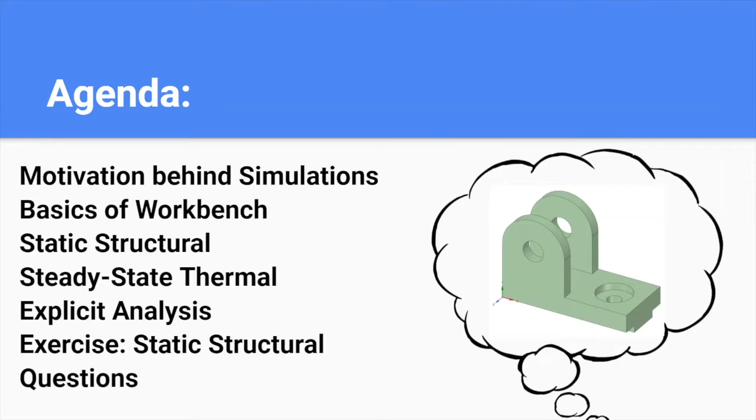If Kyle hasn't already mentioned this, this workshop is going to take about an hour and 15 to an hour and 30 minutes, maybe even less than that, but we'll see.

This process can be sped up by incorporating CAD design into your projects. With CAD design, you can reiterate over a program and overall get a better design and a better first prototype. Last time I went over how you can use ANSYS or just simulations in general to perform heat transfer analysis, impact analysis, fluid dynamics, static structural dynamics, harmonics, and even more to provide a complete picture of your product. In general, CAD can offer increased productivity, improve designs, save time, save money, and simplify sharing with people around the world.

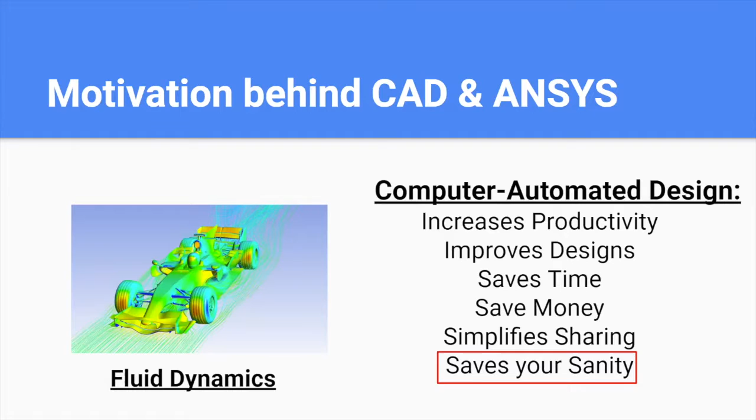If you are on ECF computers right now, you can go ahead and type in Workbench and load up ANSYS right there. I recommend you all open up your ECF computers right now and have Workbench open, because we will be performing the exercise later in the workshop.

All right, so let's go into the basics of ANSYS and showcase some simulations that we can do.

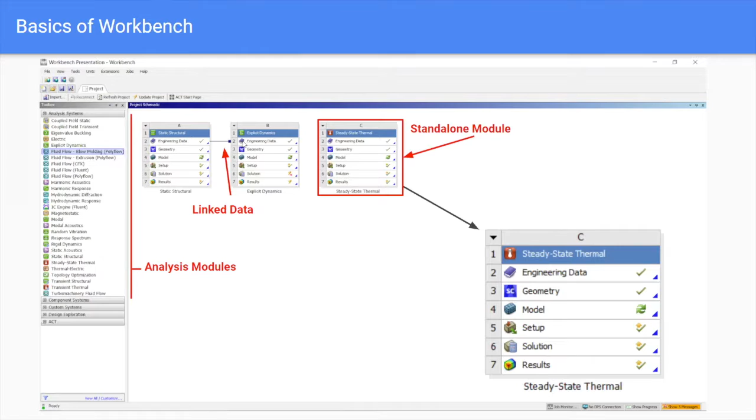So just jumping into the program right here, let me see if I can start a new share. Okay. Hopefully you guys can see that right now. This is my Workbench page.

And you can see I've already preset some modules already. These are the three modules that we'll be going over: static structural, explicit dynamics, and steady state thermal. To showcase how you enter a module, I'm going to go ahead and just delete this quickly.

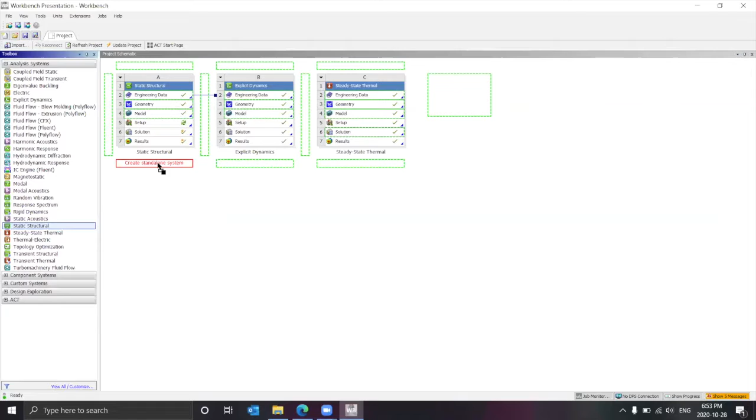All right, it's gone. Say if I wanted to perform a static structural simulation, I would go down to my analysis systems and look for the static structural module, click and drag it into any of these slots where it says I can create a standalone system. I'm just going to click it and drop it right below here, and there it is.

Now, to perform a simulation or any type of analysis on ANSYS, you have to follow a set of general steps. These steps are provided in your aid sheet, which I will provide right now.

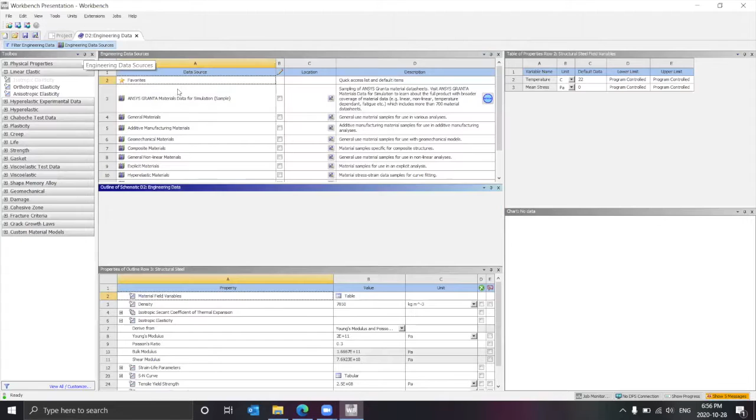Click it once, and you'll be sent to a different page, where this top box is replaced by various libraries you can choose. When you go into a library, if I click it once or double click it, the materials found inside can be found right here.

You can scroll through and see all these different types of materials, ranging from wood to plastics, carbon steel, bronze. These are very general materials in this library. You can find different materials in different libraries.

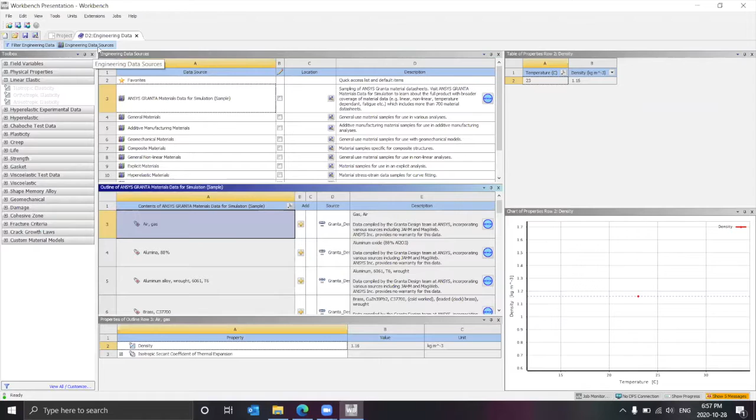For this presentation, I'm going to choose oak wood, because why not. I'm just going to click on that plus button to add it. After the whole box refreshes, I just click off of Engineering Data Sources, and my oak wood ends up in my arsenal.

If I click on it once, you can see that the material properties of oak wood are listed down here, where some give a constant value, while some give a tabulated value.

If I were to click on table, for the tensile yield strength, the table comes up in this top right corner. This is where you'll see all your tabulated data, and the bottom right corner is where you'll see the data on the table but graphed. Because there's only one table point, you're only going to see one graph point.

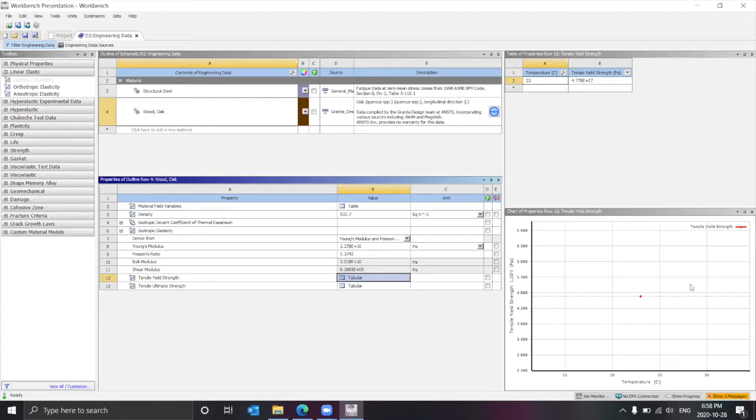Now, say you don't want to use the ANSYS library to find your material, say you want to make your own material. I want to make my own material and call it, I don't know, blue. Okay, well blue's been made, but there are no material properties attached to it.

If I want to attach a material property to it, let's say Poisson's ratio or just some isotropic elasticity, I can go to the left toolbox. This whole left-hand side has a variety of material properties that I can drag and drop from and apply to my model.

So I have blue selected, and isotropic elastic selected, and I think if I double click, it will be applied to my material. Now you can see there are some highlighted bits I have to click on—ANSYS froze over a bit, but I just have to click on and type in whatever I want. Set this to megapascals. That is very small.

Whatever, that is very big. Hold on, there, okay. And Poisson's ratio, you can just set it to something like 0.2 or something, and then you can add more material properties as you see fit. That's about it for engineering data.

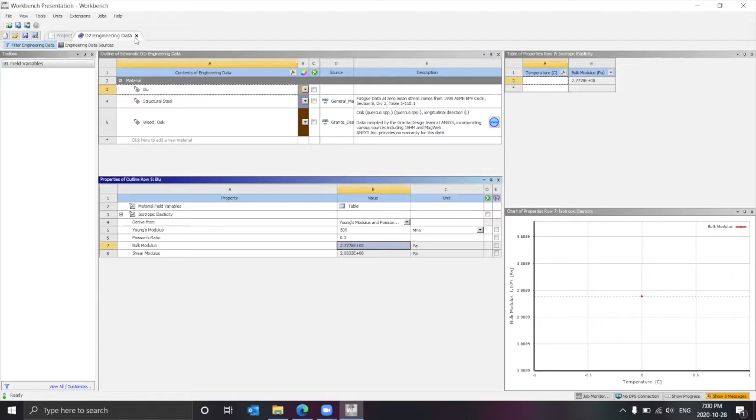Once again, you just start off with your basic arsenal here. If you want to add more materials, you go into engineering data sources, pick out your material, and you can review the properties here, tabulated data here, and graphed data here. Once you are done with engineering data or picking out your material properties, you just gotta click the X button right here, and you'll be brought back to the project page.

Once you're done with a certain section of your module, you'll see a check mark appear on the right side. That means that you've performed everything you need to do properly, and you're ready to move on to the next step.

The next step is, like it says in the sheet, to create your model. And to do that, if you double click the geometry tab, you will actually open up SpaceClaim, where you can go ahead and model whatever you want, and it will be saved into that module.

However, I have a model that I want to showcase to you guys. And to do that, I'm just going to import by right-clicking and clicking on import. It's already here, but you can go ahead and click browse and just search up the SpaceClaim file for yourself. But I have the model right here.

I'm just going to click on static model. And look, as you can see, check mark appear. I'm just going to go into SpaceClaim and just showcase what the model is. And from there, we'll move forward. Let's let SpaceClaim open up for a second.

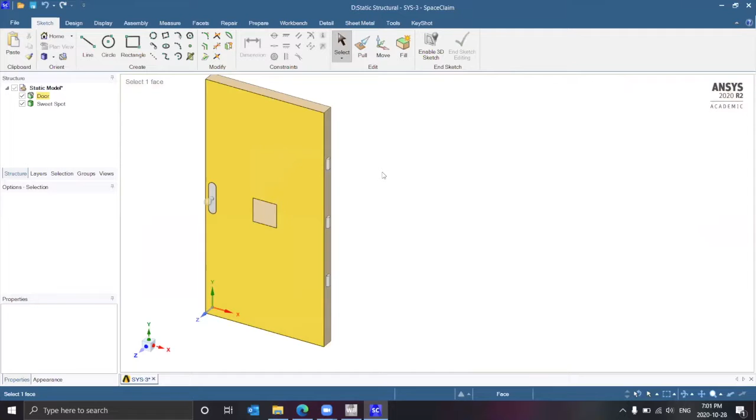Okay, but this is just a rectangular prism. No, it's not. It is actually a door. Why did I model a door? Because I wanted to showcase a sort of generic situation that you may apply static simulations to, and might be useful for your everyday life.

So imagine this door is in your way and it's locked, and you can't go around it, and you have to go through it because there is something that you want on the other side. Let's say, I don't know, your phone, your treasure, or whatever. Okay, and you don't have the key. As you can see here, I specifically did not model a keyhole, so you can't use a key to get in. And this is an assembly, so that doorknob doesn't move as well. So this door is basically non-functional. It's kind of just stuck in the wall. How would you get through?

My first idea was to just press against it, press very hard against it until it breaks. And when it breaks, I'll be able to go through. So I want to use ANSYS simulations to figure out how much force I would need for this door to break. And that is definitely possible.

The first step, though, is of course creating the model. But an important part in creating the model is that you want to simplify the model so that it only fits the context of your situation. Because the bigger model you have, the more complex model you have, the longer it will take ANSYS to calculate the result for it. So if you want to save your time, you would want to have a much simpler model.

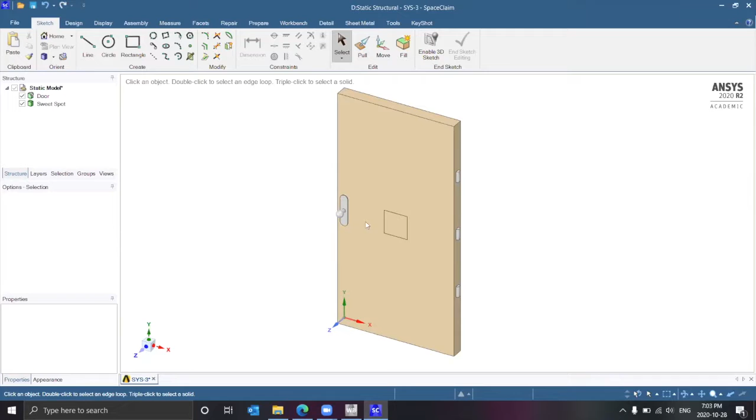In my case, I'm not going to be pressing against the entire door. Rather, I'm going to be pressing against this single section of the door, and I'm going to be trying to break this part. In my mind, once I break this part, I've basically broken through the entire door. I know that if I press my hand against this part of the door, or the hinges, or whatever, it probably isn't going to feel much stress. I'm only trying to break here.

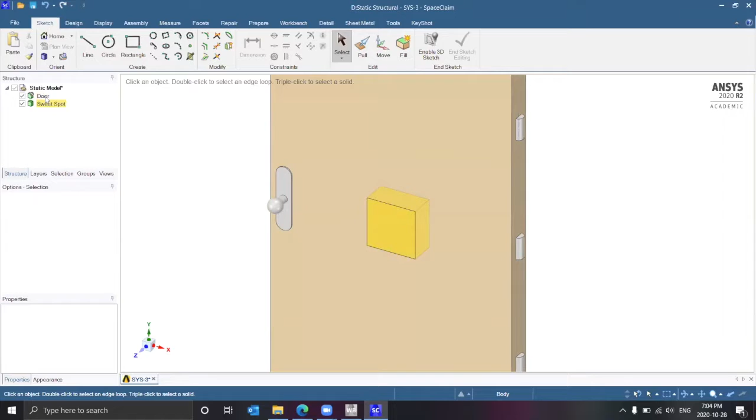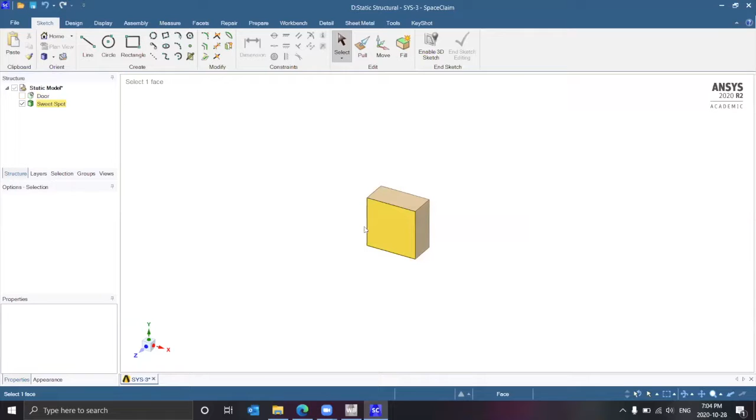So what I've done is that I've separated the door and what I call the sweet spot into two different solid objects. And when I go and right click the door, I have it suppressed for physics. What this does is that it ensures that the remaining part of the door does not show up in my simulations once I get to that step. And as an extra step, I can choose to just hide it altogether. So now I just have the sweet spot.

Before heading off into the simulations portion, one important part to check on SpaceClaim is your topology, or in other words, the surfaces that are in contact with each other. You can check that by clicking on the overall structure tree and going down to properties to look at shared topology. Here, I want my shared topology to be none, because in this case the door doesn't really exist. But if you have models with connecting or touching parts, you'd want to change the topology depending on whether you want to merge or share.

The difference between having none versus merge or share is that if merge or share is enabled, the two bodies will somewhat merge, and later when you create a mesh, the mesh will be combined between the two objects rather than staying separate. So depending on your project and application, this might be important for you.

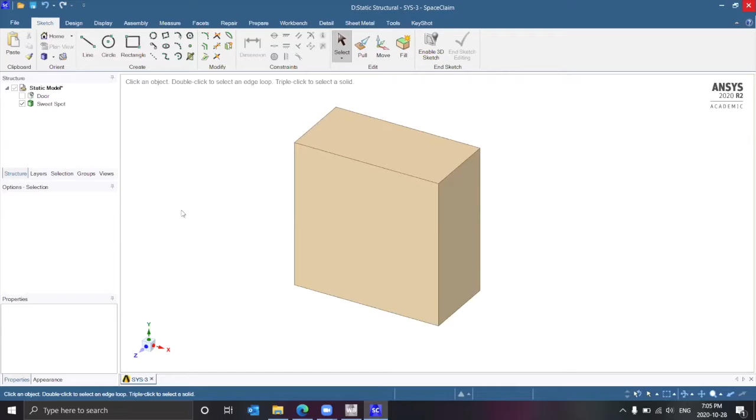Once you're done with your model, you can just click X. SpaceClaim already saves the model into the module. You can go ahead and go into the model section. This takes even longer to load, so just sit back for a bit.

Yeah, it's taking a while. If you don't want to just keep staring at this, you can check the bottom left where it says starting mechanical, just so you know that Workbench is working on opening the program.

Okay, now it's loaded up. Just like how in a Workbench module we were going down the list—engineering data, geometry, and model—we're also going to be going down the list over here, specifically this part, to complete our simulation. This is common across any sort of simulation that you do.

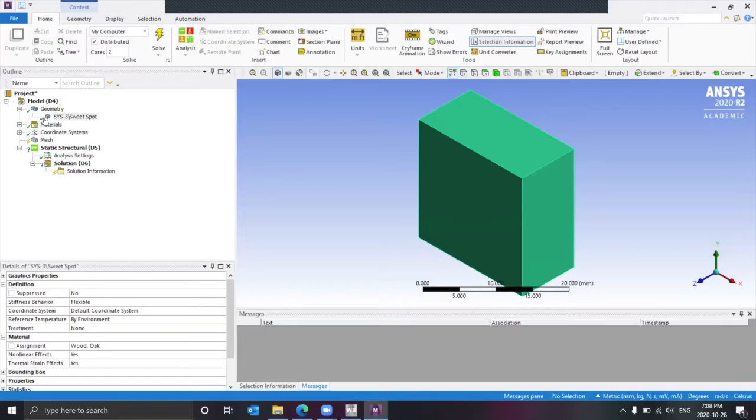Here you can see that the default assignment is structural steel, but I want my door to be made out of oak wood because I actually want to break it down. Now that that's been done, you can see the little check mark appear, and that's all good. Materials isn't really important—it just lists all the materials you have in your engineering data. You don't really need to look at that.

And you don't really need to look at coordinate systems either. This just shows the global coordinate system or whatever extra coordinate systems you may have inserted in your SpaceClaim model.

The next important part, which is also in your sheet, is the mesh step. To perform a mesh, what you have to do is click on mesh once, right click, press insert, and you first want to insert a sizing of your mesh. I'll explain a bit more what a mesh is once we actually create it, since it's easier to explain visually. So the first thing you always want to do is insert your sizing.

You can see there are two highlights I have to fill out, the first being geometry. So I have to go to my selection tools, select my body using the body select tool, and then apply it. Now the mesh is applied to that.

ANSYS sets a default mesh size depending on the size of your model. You can change it to whatever you want—I'm just going to set it as 2 millimeters, though it doesn't really matter for me. In general, if you want a more accurate result, you'd want a smaller, finer mesh. If you don't care about the result for a specific component or part, you can go for a larger mesh.

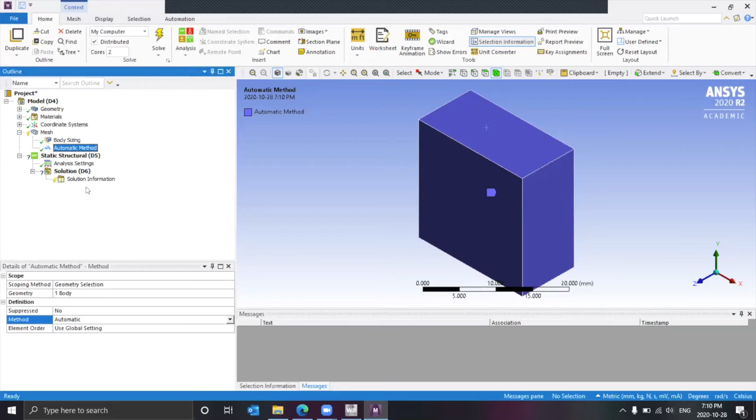So to actually generate your mesh, all you have to do is right-click your mesh once again, and instead of going to Insert, you go down to Generate Mesh. You can see that ANSYS is working on it pretty quickly because it's a small object, and the mesh has been made.

So what is a mesh? Basically, a mesh is made up of nodes and elements. Nodes being these edge points right here, and elements being the lines in between them, with an element being the square shape. To oversimplify what goes on, a calculation happens on each node, and the result is put into a matrix. Each element has its own elemental matrix.

In this case, it might be a 4x4 matrix of stress or strain results acting between each of the nodes. Then you expand that, and every element has its own matrix, and there's a huge global matrix which is solved and gives an overall result of which parts of the model, which elements, are receiving the most stress, and which aren't receiving that much stress or strain.

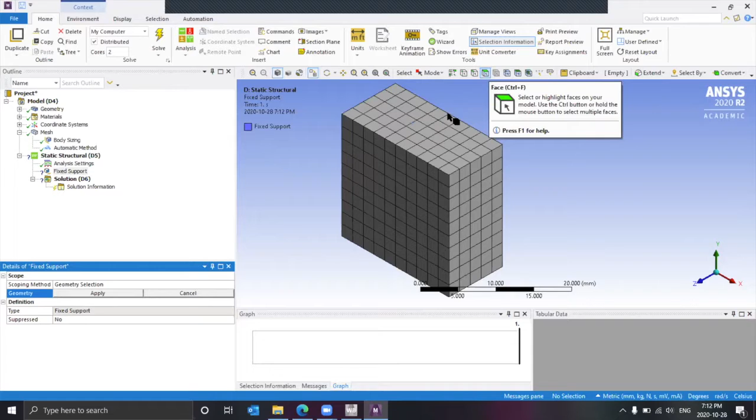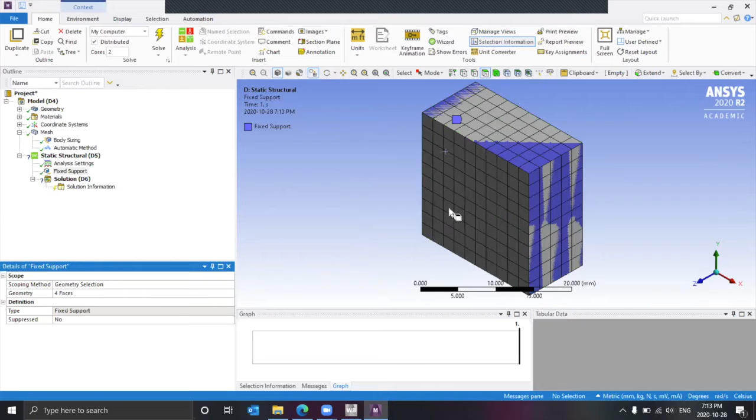Using the face selection tool, onto the faces while pressing and holding control, I select my door piece, because in reality this door piece is attached to the door, and it isn't supposed to be moving anywhere. So once that's done, just apply that. You can see that the fixed support has been applied on all 4 faces with the coloring.

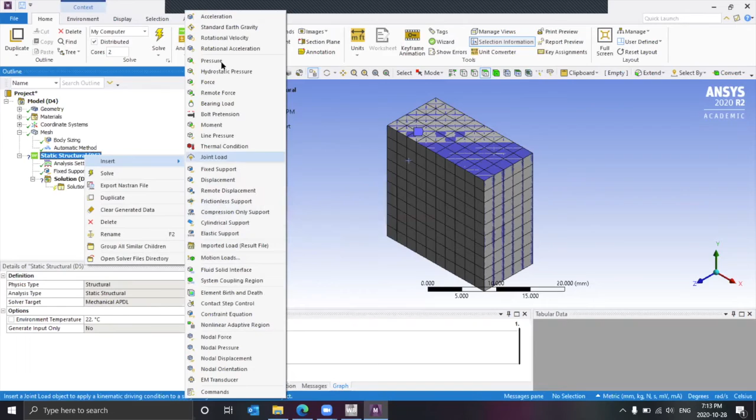Next, I'm going to go ahead and apply a pressure on this face right here. I'll do that by pressing insert, and instead of a fixed support, I could have also done displacement or a frictionless support. But I'm going to apply a pressure right here. It wants me to select my geometry again, so I'll use face selection, use this face, apply, and apply a pressure of let's go with 100 megapascals. I don't know if that's exactly right, but for the sake of simulation, we'll just use that.

All right, the arrow's going in the right way. We are pretty much set, as you can see with the array of check marks. The last step is to call upon your solution, to tell ANSYS what you want to see. To do that, you right-click solution, press insert, and I want to see my total deformation. I also want to see the max equivalent stress, and the equivalent strain.

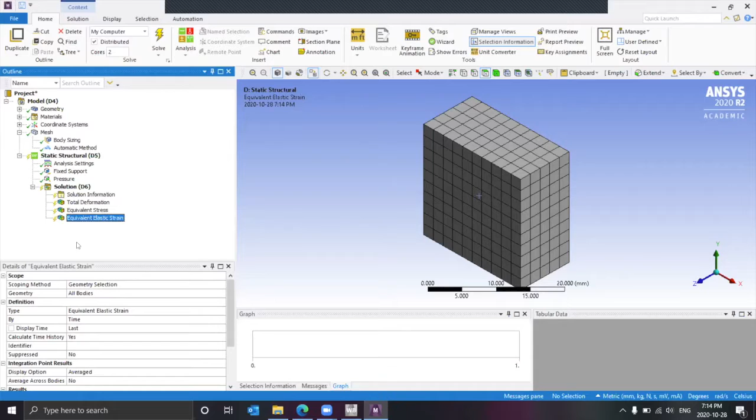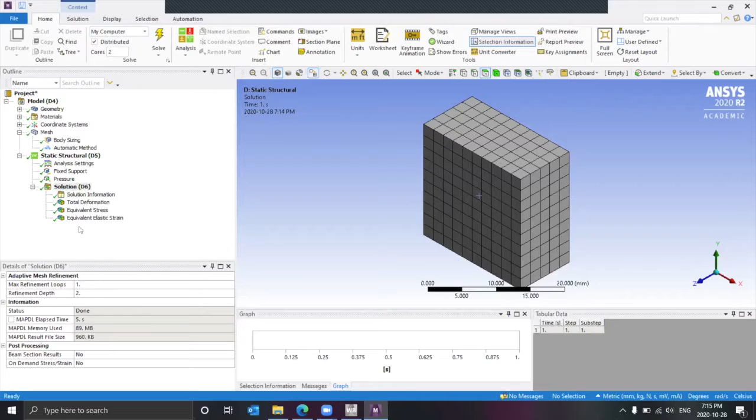All right, once I have all those set, I'll right-click solution once again and press solve. ANSYS will take a couple seconds to solve the model. You can see that they all have check marks beside them, and that means the simulation has been a success.

To see your result, you just click on each one, and you can see the deformation that occurred when I pressed against the door with 100 megapascals. You can see the stress, and that it's especially accumulating on the edges where the door is fixed to the remaining part of the door. You can also see that there is an equivalent amount of strain happening over there.

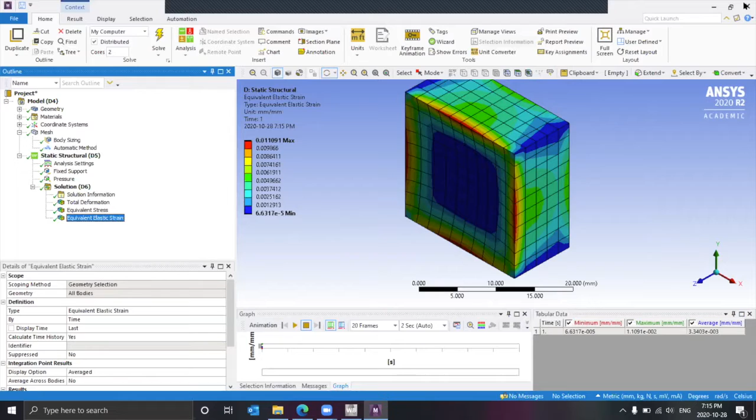So this is just one example of how you can perform a simulation on ANSYS. The general steps are more or less the same on any module you decide to choose. I'm going to be moving on to explicit dynamics to showcase how you can perform an explicit dynamic simulation.

I'm not going to make a new module because, as you saw before, solving could take a while depending on the simulation, and explicit dynamics especially takes a very long time to solve. So I have it already solved, and I'm just going to go over my steps.

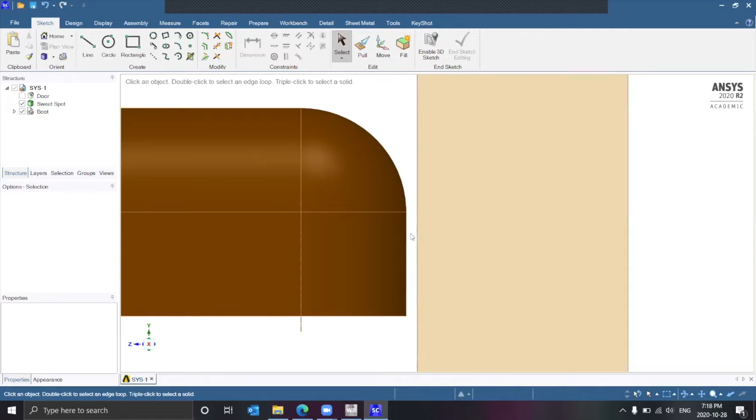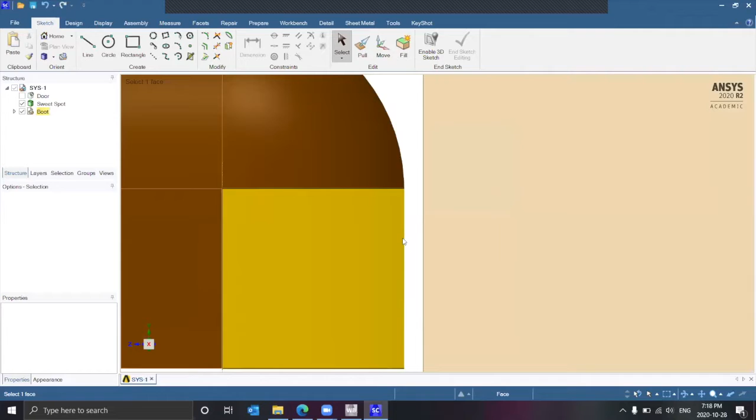The reason you want to do that is because the further apart the objects are from each other, and the more you tell ANSYS to make them move — if I had to make the shoe move from like a meter away, or even a centimeter away — the computation time ANSYS will take to complete the simulation is going to increase exponentially, and you don't want that. You want a very quick computational time. Even here, with like a 0.1 millimeter gap, this takes at least a minute or 2 minutes to do, which is why you really want to keep it as close as possible.

Yeah, that's basically it. I just wanted to showcase what I modeled right here. Because the two objects aren't touching, there is not going to be any shared topology or anything, so we don't need to worry about that, and we can just go ahead and click off.

All right, going to our model. I'll let this load. Once I have this loaded up, I'm gonna load the remaining two modules just so it's quicker. Okay, that is loading up. See if that works. Okay, so this is all loaded up.

It's the same general steps to perform the simulation here, with a couple variations for explicit analysis specifically. Once again, we go to our geometry and click on both to make sure they've been transferred in properly, and we assign our material down here — in this case, the oak wood door and the structural steel boot.

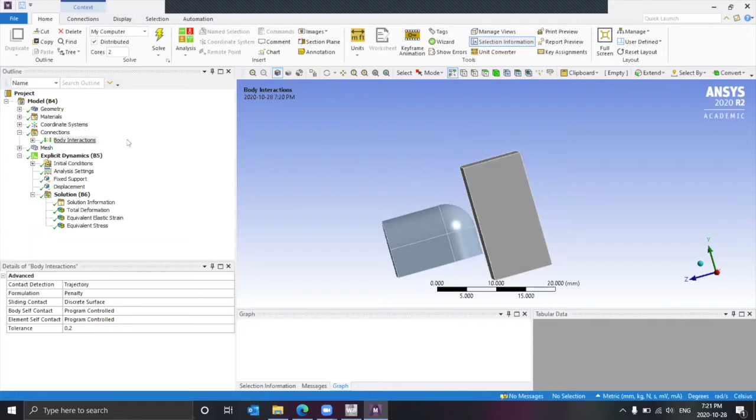We can skip materials, skip coordinate systems. You can see a connections portion right here, which is showing 0 body interactions. This connections tab basically showcases any sort of contacts happening between two or more objects. Because there's no actual contact going on between the two, we have no body interactions, but you will see one in a bit.

The mesh has already been completed. I inserted a body sizing for each object, and I made it automatic method for both — I let ANSYS choose the best method to make the mesh.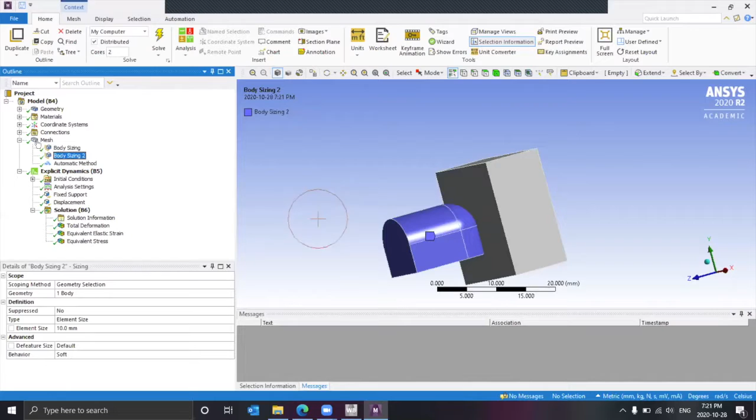The reason I chose a different body sizing for the two materials is because I really only care about the door. I don't care about my toes, my shoe, or what stress accumulates on my boot. If my foot breaks, so be it—I'm just trying to break this door down. So I'm going to have a finer mesh on my door so I can more accurately see when my door fails, and less accurately see if my foot fails.

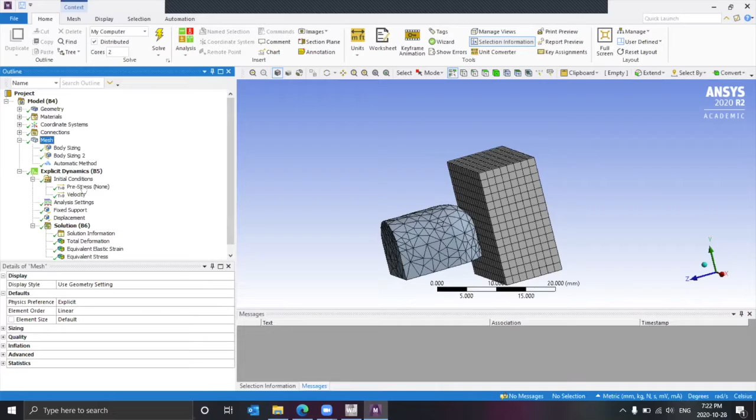Once that's done, in your explicit dynamics tab you first set your initial conditions, which can either be a pre-stress, which I listed at 0, or a velocity, which we have to list because the shoe is hitting the door with some velocity.

Here I went a bit crazy—I selected the body first of all, that's why it only has the one body selected. And I put in a velocity of negative 50,000 millimeters per second, which, if we change the units in the bottom right here, is 50 meters per second. So yeah, a bit fast.

Once you have those two done, you'll see a check mark, and you can go ahead and fix your analysis settings. You may have seen analysis settings in your static model, but I never went over it because it didn't really matter. It matters here now because how you configure your analysis settings determines how long ANSYS will take in solving the model.

If I click on analysis settings and go down, you'll see a lot of different things, but there are only two things you need to know. Those are your end time, meaning how long you plan to perform the simulation for. Here you can see I made it in the range of microseconds—this is happening extremely quickly, and I only need to see the stress in that small window of time.

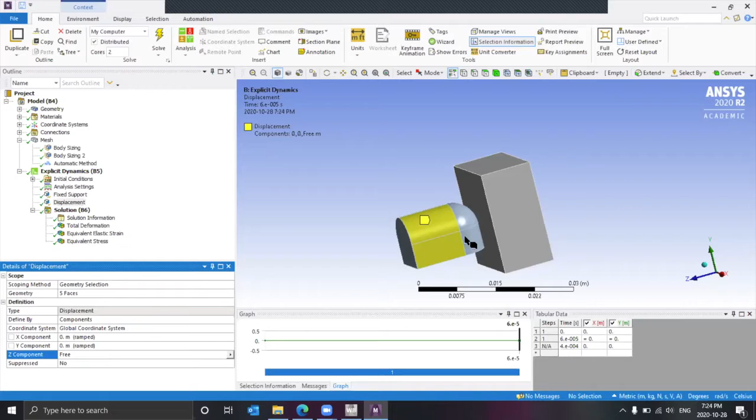What you would do is first select either the body or all the faces, and then select which of the three axes you want the object to move freely at. In this case, I selected that the Z component is to be free because the shoe will be going in the Z direction, and I fixed it so it can't go in the X or Y, because we simplified it enough to go in the Z.

A note on simplifying your simulations, or adding assumptions, like the one I just did, where I said my shoe isn't going to be going in the X or Y direction at all—only straight in the Z direction. This is an assumption that, if I were in an engineering design project, I would have to list down somewhere that I made this kind of assumption, or else your professor or client might be a bit questioning regarding the results.

You could be a bit more complicated and add your X and Y components, but simulations are able to give sufficient results even if you simplify it a bit.

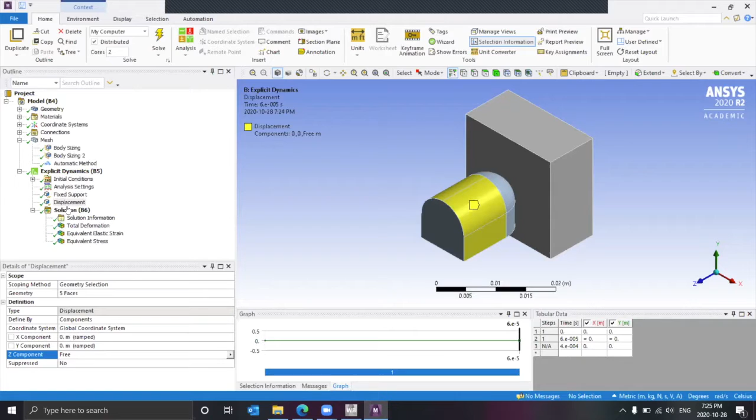All right, once you're done with that, you have everything else set up. You can go ahead and call upon your solutions by right-clicking, insert. I call upon my deformation, my strain, my stress—they're all right here, and you can see the results already preloaded. Once again, to solve, all you have to do is right-click and press solve, or it would be up here as well.

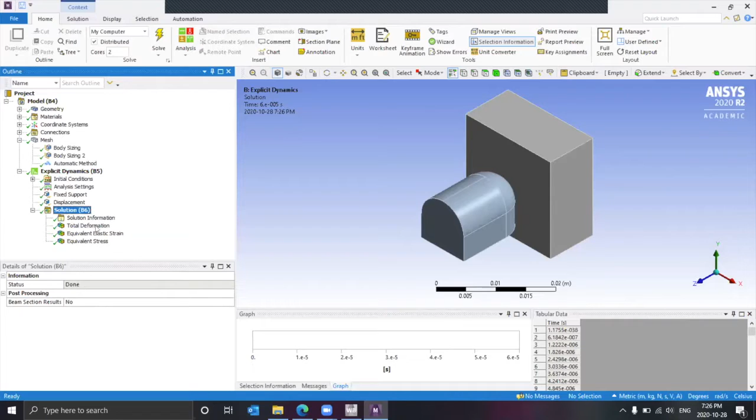To see your explicit analysis in action, all you got to do is press play, and you'll see it happening. You can increase the frames to up to 100, and you'll see it happening a bit more like slow motion. You can see my foot gets a lot of stress or deformation, while the door doesn't really get much.

So a couple questions you might be asking is why isn't this door splitting apart from the back, or exploding? Well, it's because of the material I selected, a general oak wood material with only elastic properties. The material does not have plastic properties or properties in the failing region of the stress strain curve, so ANSYS does not know how or when this material will fail, and so it can only show the elastic portion of the simulation.

If you want to add plasticity or failure conditions to your simulation, you would go into engineering data and manually input that plasticity data as a table. You'd need a variety of points at different strains for different stresses.

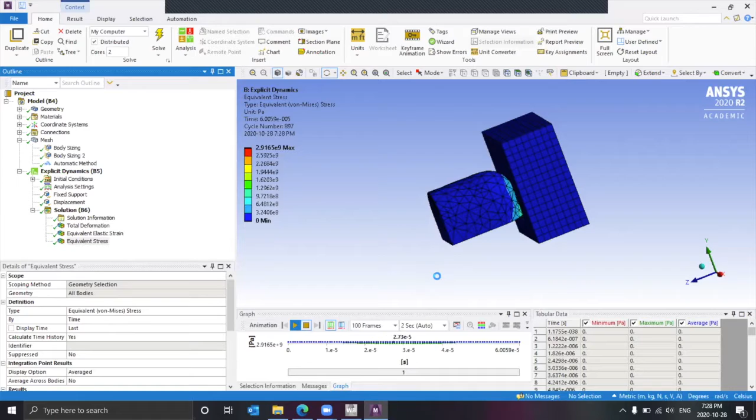Same story with equivalent stress, you can see nothing really is happening. But that is overall how you can perform an explicit analysis simulation.

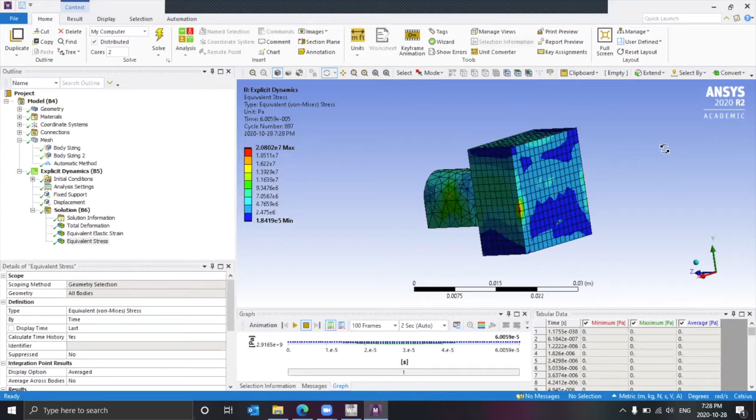Now that that is done, we can move on to the last module we're going to go over before the exercise, steady state thermal. We've already gone over the first two, engineering data and geometry, so I'm going to skip right to the model, which did not load, so we have to wait a bit for it to load again.

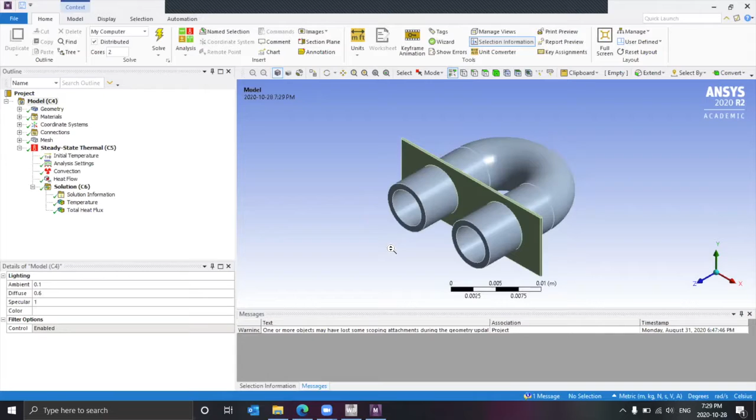This model is separate from the whole door breaking thing from before. This is just a simple model to showcase steady state thermal. It's loading up. This is a simple piping system which will have heat applied on the inner walls, and a fin acting as a piece to transfer heat away from the pipe, sort of like a heat sink.

Once again, checking if my geometry made it through. It has: my piping and my fin. They're two separate objects because I want to set my pipe as copper alloy, which I got from the engineering database, and my fin to be of aluminum alloy.

Once that is done, you can go down, and connections has something interesting. If I go through the menu of connections, you can see ANSYS detects the contact between the piping and the fin, and the areas or faces are highlighted. I can define the type of contact these two are facing by going by type. By default, ANSYS assumes it is bonded, meaning the two objects aren't supposed to move between each other, which is what we're keeping.

But if you wanted the fin to be able to move against the copper alloy with some sort of friction, you can select that here, but you would have to enter a frictional coefficient. I'm just going to stick with bonded.

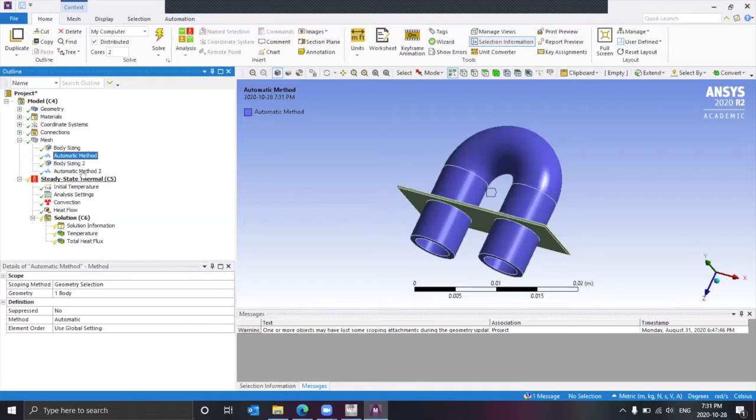Same story with mesh, you apply a body sizing for each thing. I made the body size of each element sort of the same because I want to see the heat flux and temperature for both objects, and I also just applied the automatic method for both of them.

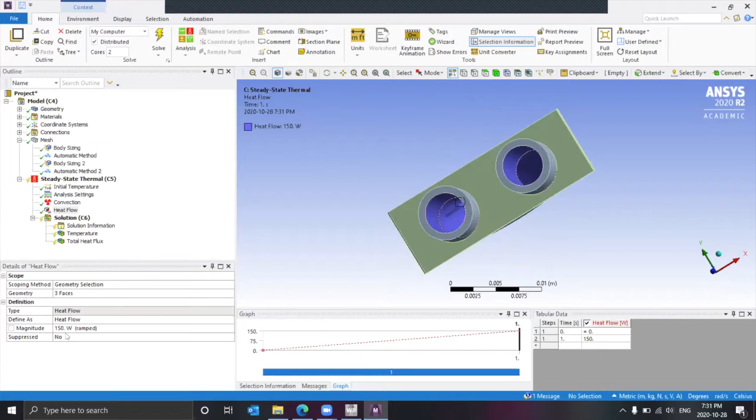For applying my boundary conditions and loads, I once again right-click Steady State Thermal and insert, and I have a library of things to choose from. In this case, I went with convection and heat flow, with heat flow being the inside of this piping at 150 watts, and my convection being on the faces of the fin with the film coefficient at 2.5 watts per meter square degree Celsius.

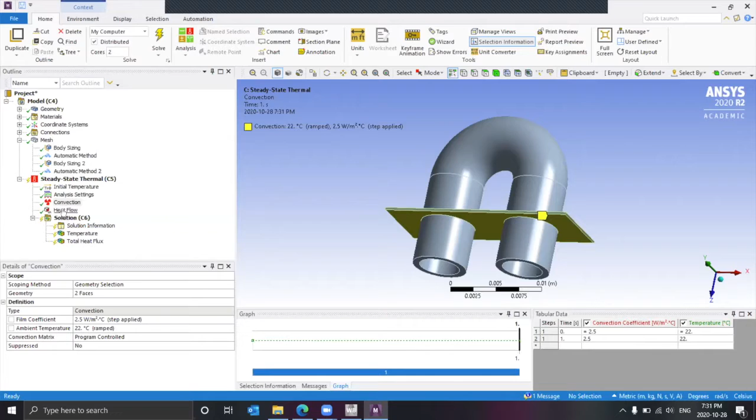These numbers are something that you'll have to put in when applying these sort of boundary conditions. So that's just something to keep in mind.

You're also able to apply an initial temperature. By default, I believe it is about 22 degrees. You can set it to whatever, 24, room temperature, whatnot. And you can also mess around with your analysis settings right here.

Steady state thermal isn't as demanding as explicit analysis, so you don't really need to do much here to save computational time. Because I had made an edit up here on the connections part, ANSYS is requiring me to solve the model again, which is no problem. But you can see here that I called upon insert thermal temperature and insert thermal total heat flux because I want to see those two things. If I just right click and press solve, it should solve in a quick second.

So this error message that I got right here is something to do with the geometry, but because I have my results here pretty successfully, this isn't a very major error. There are some errors that will not allow the simulation to go through, and it will typically tell you what you would have to do by just double clicking and reading the error, and you'll know okay, what went wrong. Was my mesh too fine? Was my temperature too high? Was it too complex for ANSYS to solve? You'll be able to figure out what's the error, and you'll be able to solve it.

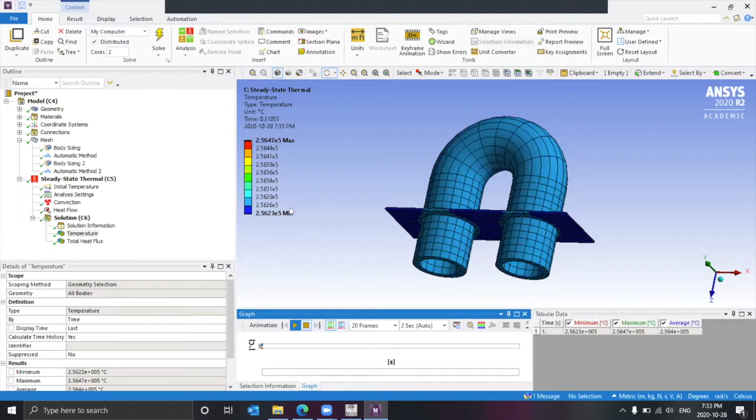So if I go up here and just click on solution and click off the error tab, I can press play, and you can see how the temperature changes over time. And I can also see how the heat flux changes over time. You can see that there is a good amount of heat flux that goes into the fin, but possibly not enough. Maybe another fin right here might be good for additional cooling of the pipe.

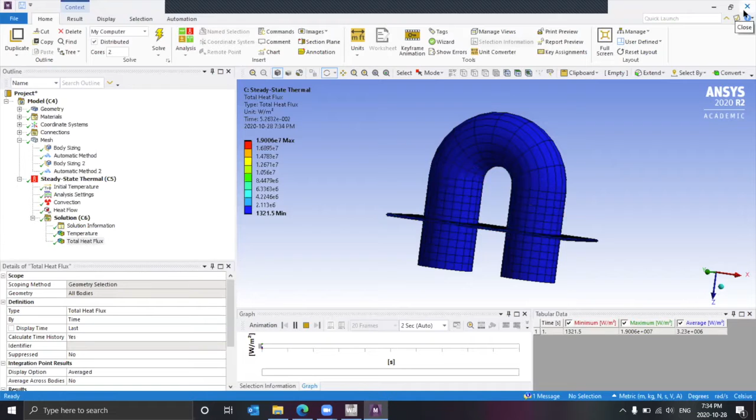Okay, and that is about it for the 3 modules for ANSYS Workbench. Now we will be moving forward, and I'll be handing it off to you guys to work on your own little exercise, which you can find on the screen right here or in your H sheet.

The situation is you have this model to first make. You have on Workbench, you would drag and drop the static structural model module, go through the steps, and you would have to make this model and perform the following simulation. Just keep in mind that the material you'll be using is structural steel, so you won't really have to do anything in the engineering data section.

And while you have your results ready, ask yourself the following questions. What is the critical point or the area? Where is the max stress or deformation? And based on your first two answers, where would you make improvements on your design? These are key questions that you would be answering in any sort of design project, so it's good to practice it here.

I will give you about 5 to 10 minutes to work it on your own. After that, I'm going to start going through the model by myself, starting by making the model and performing the simulation by myself. So if you're stuck anywhere, you can come back to the Zoom call and just watch me do it slowly. I'll let you guys work on it for about 5 to 6 minutes, and then I'll get started on it by myself. If you have any questions, you can feel free to ask me right now too.

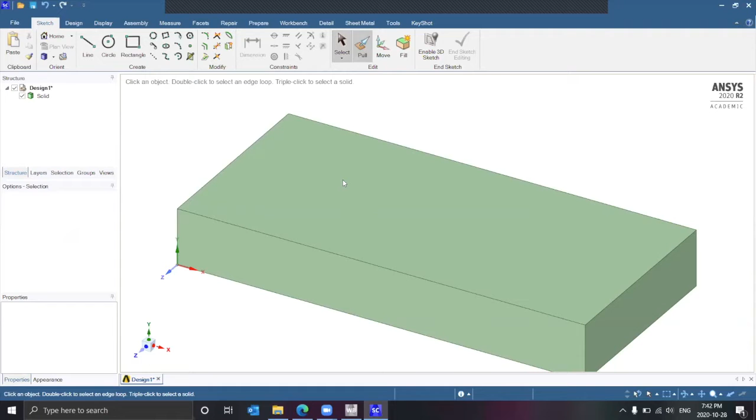Since you're currently working on the model, do we have to do the model in ANSYS SpaceClaim, or can we do it in another program? Is there an option to import from another program?

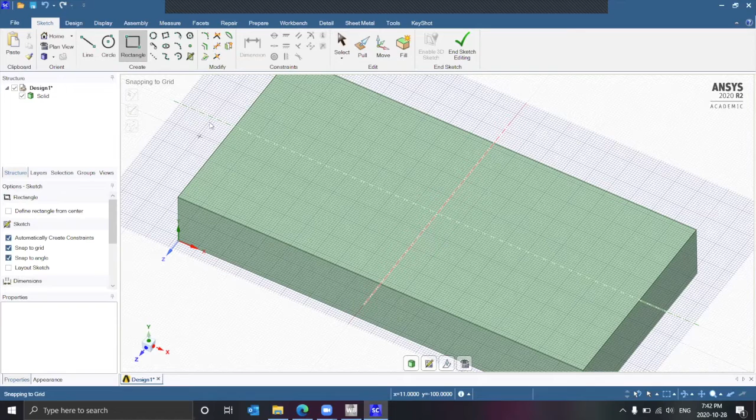Yes, but it does require a good amount of steps. I'm assuming you want to make the model in something like SolidWorks. I'm fairly certain you can open SolidWorks parts in SpaceClaim and then save it as a SpaceClaim file, so there isn't explicit importing.

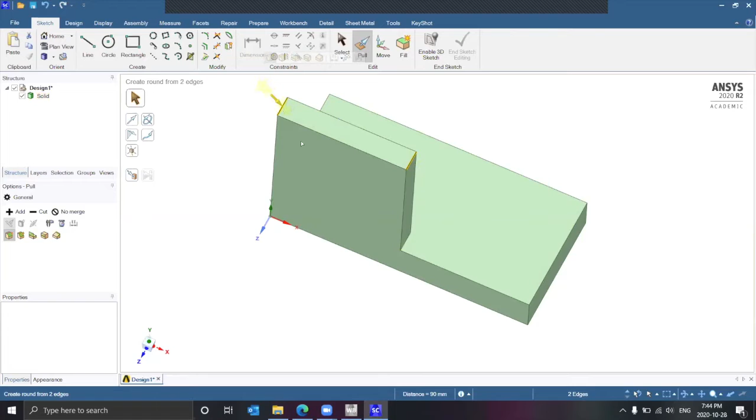Let's select this face and make the circle. Pretty sure the circle is right here in the middle, that's how I made it, and it's a diameter of 30 millimeters.

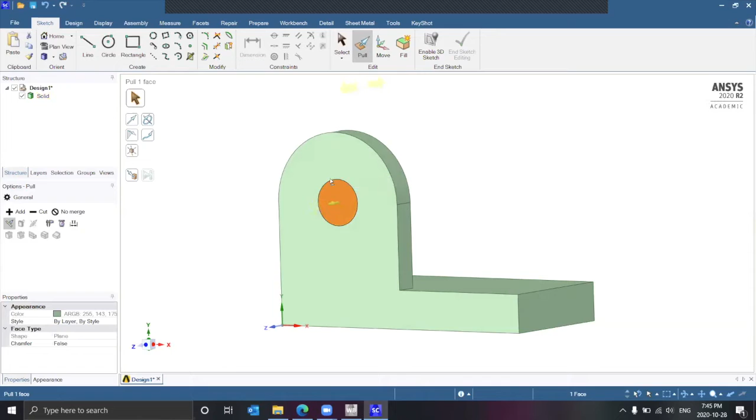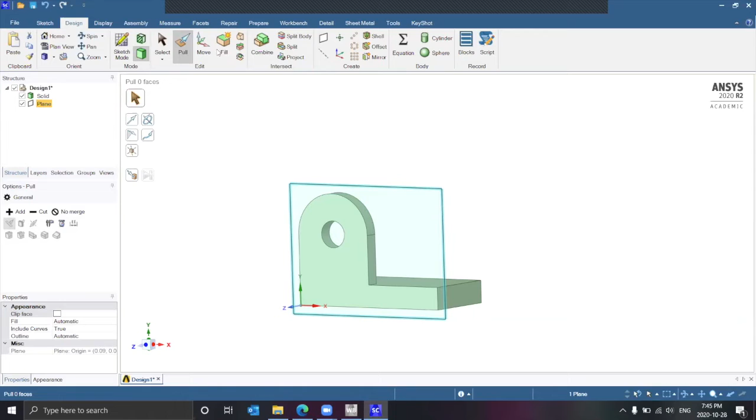We'll cut it right there. Just gonna select this, get out of my sketching mode. It's gonna be a bit lazy. One second, just gonna move it over. I believe that's the middle.

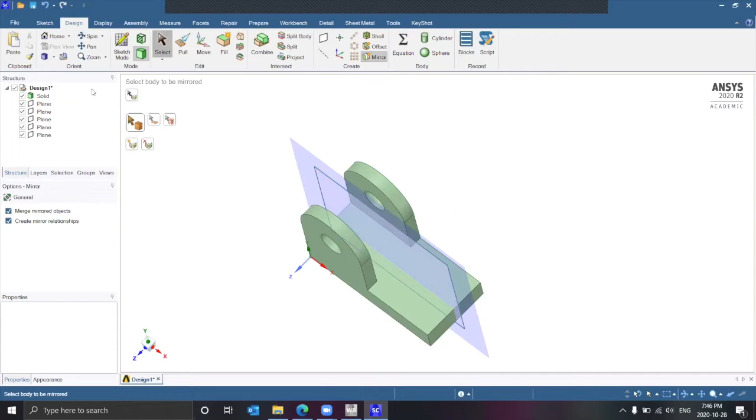I'll utilize the mirror function, first selecting my mirror plane and body so that it's all mirrored up. At this point, I don't need the plane anymore. Get rid of all these duplicate planes.

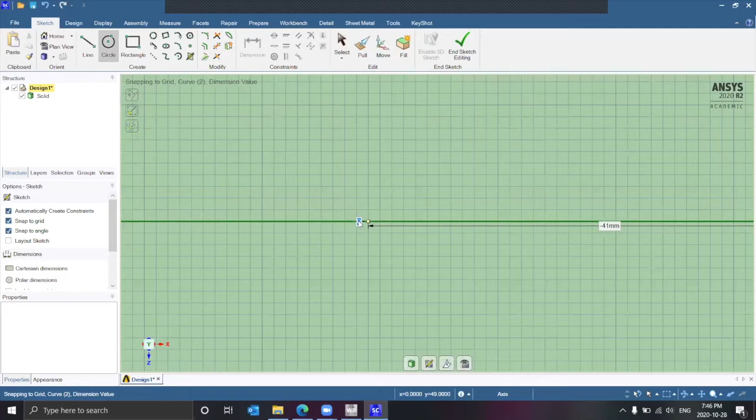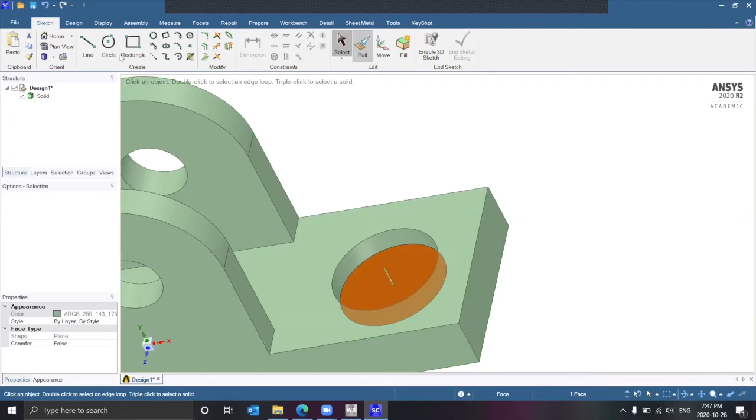Make it 50. Pull that. Cut it, but only by 10. Then sketch on this face once again, right in the middle, and just make a 20 millimeter circle. Just leave it right there because we still have to make the bottom part.

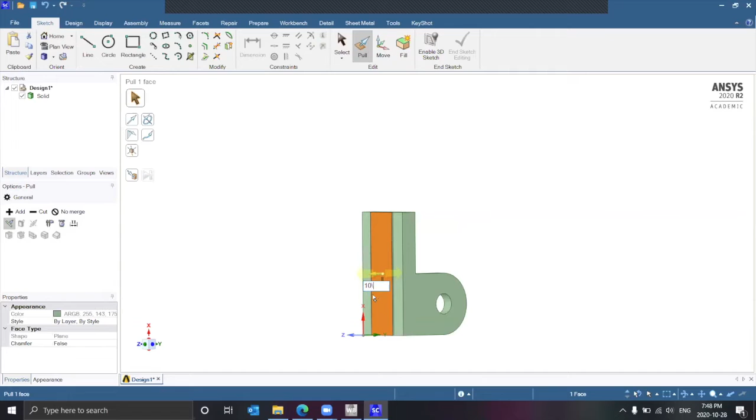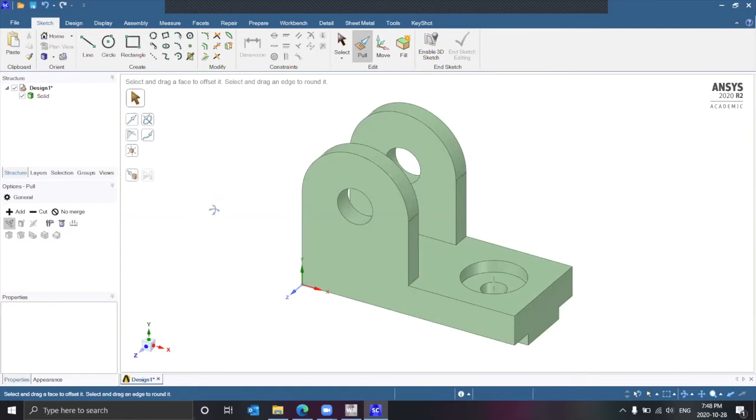Now that that is done, just go ahead and pull this all the way through. I believe that is it for the model, the hole down there, and the bracket has been made. Now that I'm done with the model, I can just click off of it. Don't really need to save, ANSYS already has it stored. Check mark done, and I can go ahead into the model.

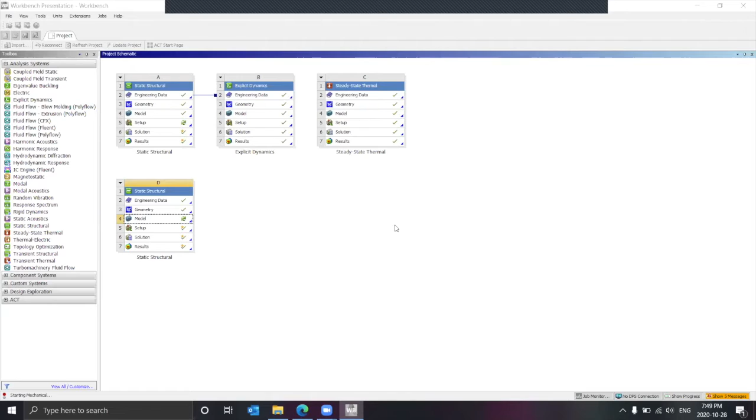Once the model opens up, I'll do the simulation and discuss the questions I've listed for you guys. It's showing the old model, but it should update in a second.

So Hill, relating to your question about importing SolidWorks files into ANSYS and whatnot, what I found is that while you can import SolidWorks files into ANSYS, you cannot export ANSYS files to SolidWorks. So that's one thing to keep in mind. It would make sense that one would tend to import from SolidWorks to ANSYS to do simulations. That's good, thank you.

I will say though, being the stubborn guy I am, I have found workarounds to export ANSYS into SolidWorks in case I want to do something, but a lot of the geometry is lost if it's a complex object. Some faces don't transfer 100%, so it's not very reliable, something to keep in mind. Thank you, no problem.

Once that's in, I can assign my material to structural steel. I can also do water if I wanted to, but structural steel for now. I'll use my mesh with body sizing, already been there from before, but I'll just select my geometry and apply.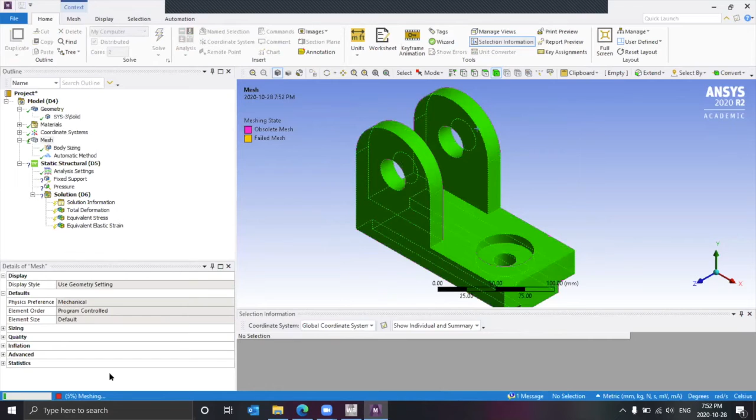So ANSYS has a limit to how many nodes or elements you can have on a singular mesh. To see how many nodes you have, you go to mesh, details of mesh, and all the way down to statistics. Down here you can see I have 69,000 nodes.

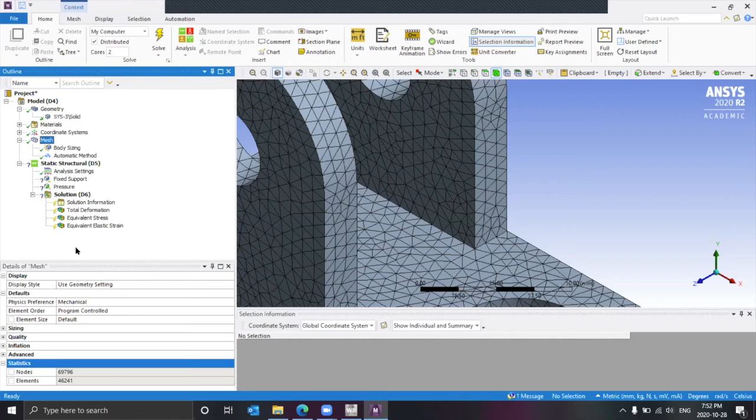That is not good because ANSYS only limits students to 32,000 nodes or elements. So just for this sake, I'm gonna quickly apply the fixed supports and showcase what happens when you have too many nodes, and how ANSYS reacts.

So let's do a fixed support on the inner parts of the circles right here. Let's apply the pressure on this face right here. 10 megapascals.

Okay, now I already have my 3 things that I want listed. If I press solve, I'm gonna get an error, I believe. There we go. Your product license has numerical problem size limits. Because the limit is 32,000, ANSYS sees that I have almost 70,000 nodes, 46,000 elements. It's not going to accept it.

So I got to increase my mesh even more. Let's make it like 10, let's say. And generate, let's see what we have here. See, the mesh was even quicker, and now we have a lot less nodes and elements. ANSYS should be able to solve it once I click solve.

This is at the cost of lost accuracy, which is something to keep in mind. So you have to play around with it, maybe try and get a mesh size that's close to the limit, but not exactly, so you can get the most accurate results possible.

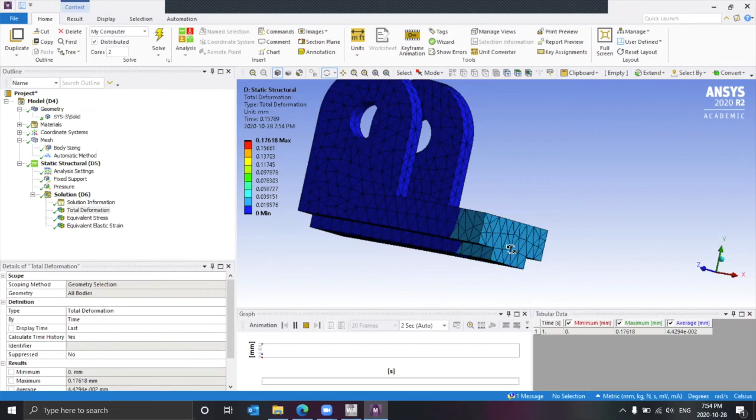So the question is, what is the critical point? Well, we can go into deformation, and this doesn't seem like it, this might be a critical point, but if we see by playing the simulation, we know the pressure is being applied down here, and we know that this part is just reactionary.

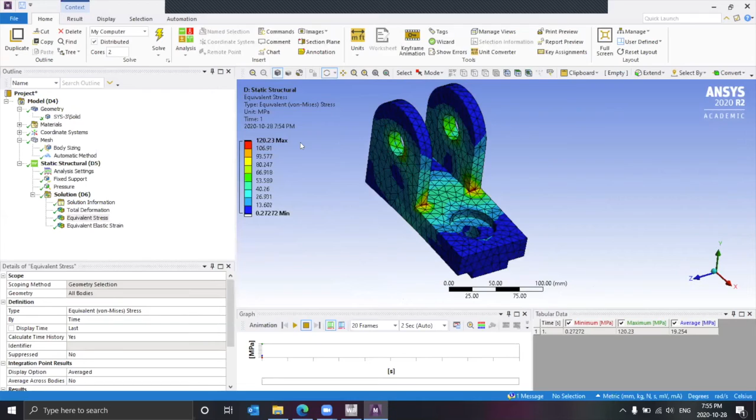I would argue that the critical point, if we look at the equivalent stress, it is right there at those corners. If you see, if I press pause, you'll see where those red marks are, those are the critical points. By extension, the max stress is about 120 megapascals, and the max deformation is about 0.17 millimeters.

Once again, you can see that because I applied a pressure here, the whole model kind of deformed downwards. If you want to get a more accurate, more realistic picture, I believe there is a method.

I am not able to find it right now. It's gone. But there is a method to see your deformation in true scale, or 1.5 scale, or however you want to see it visually. Yeah, I can't really seem to find it right now. Is it this?

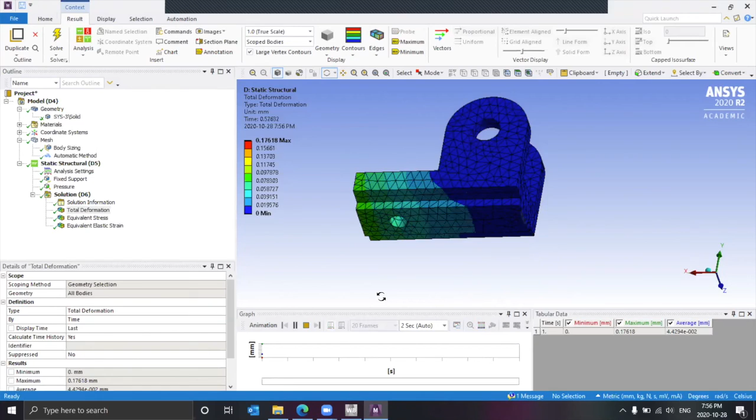Right here, yes. You have auto scale and true scale, and true scale basically shows how it would be in literal real life conditions. You can see that 0.17 millimeters really isn't that much, so it's not really that much deformation. Auto scale typically has it more exaggerated. To see this, you go to result, and in this tab right here, you look at your scale.

And the last question is what design improvements you would make. Personally, I would go ahead and try to add some kind of rib, some kind of ribbing or support structure on these points right here, maybe in a triangular shape, so I can extend the support and lessen the deformation down here.

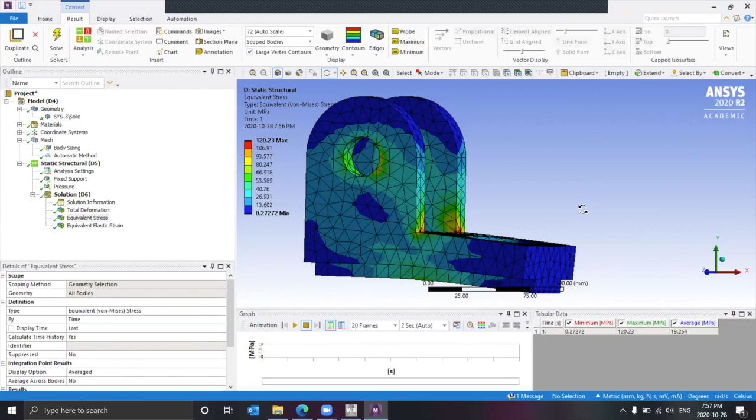This kind of design thinking is really useful for engineering design projects, because look at what we just did. We thought of a new solution without having to create a new prototype, without having to buy new material, make a new model, spend hours on making a new prototype. We did it all in a matter of minutes on ANSYS. So that's why simulations is so useful in our design projects, and why it is so important to us nowadays when working on problems such as these.

That is going to wrap up the end of our workshop. I hope you all have learned a little bit about ANSYS simulations, and I hope you all go out there and delve into the program more on your own time and learn more about it.